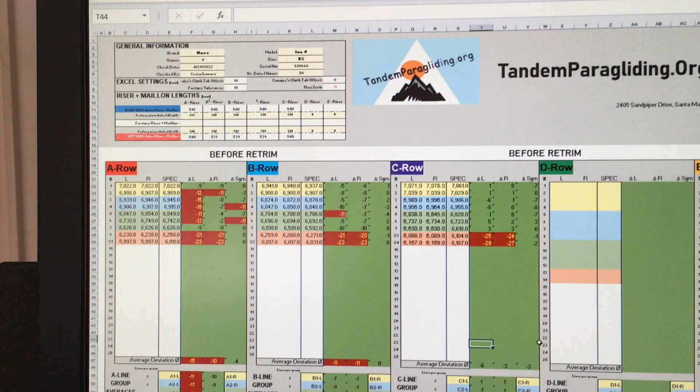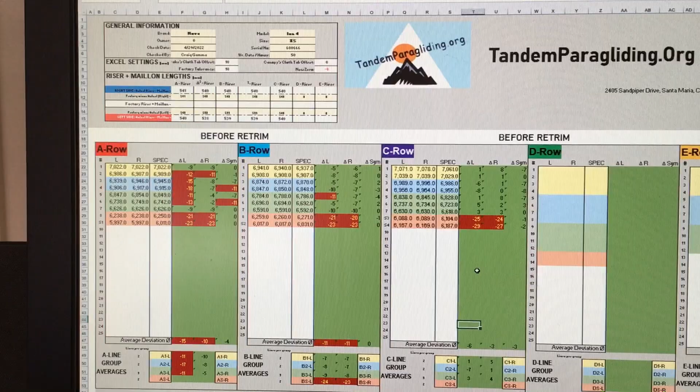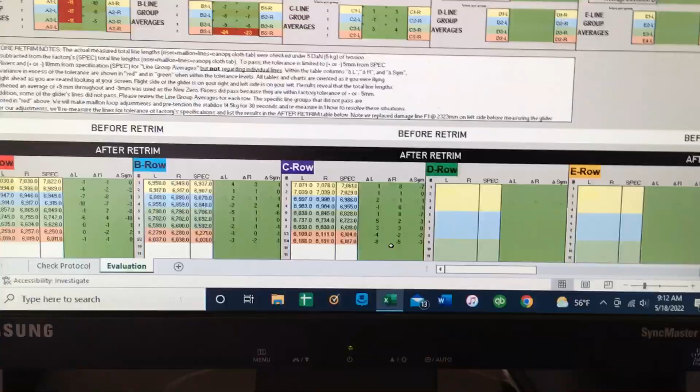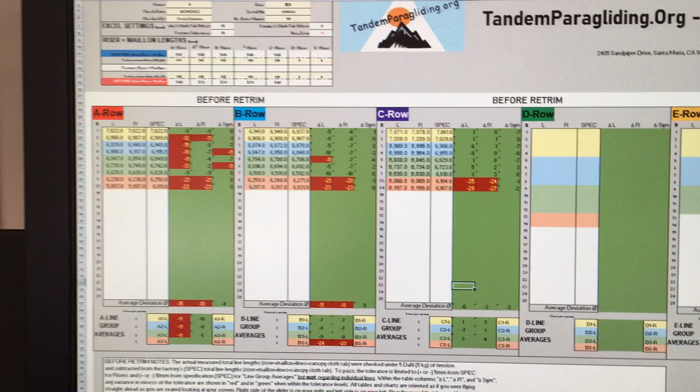This is our report, one view of it, and this is the before retrim table. If you scroll down, there's the after retrim table. If we look at the differences here, at a glance, what you see between after retrim and before retrim is the red. The red highlighted cells are the ones that are out of tolerance, that need to be adjusted so that everything looks like the after retrim report, where everything's green, meaning everything's within tolerance of factory spec, which is plus or minus 10 millimeters. So at a glance, that's all some pilots need to know: this is where we were before, and this is where we're at now.

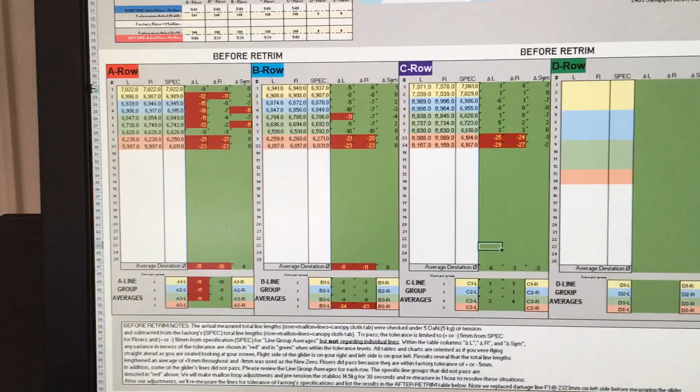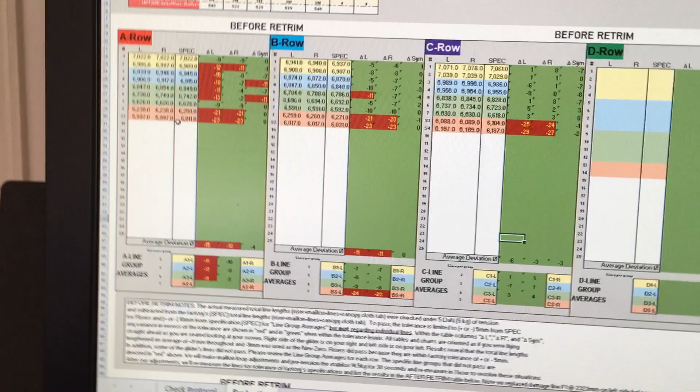But for those of you, like myself, who want to know all the little details, we can expand here further. If you look at the A row, as well as the B row and the C row, they're all broken down into colors. Lines 1 and 2 are yellow for all 3 rows, lines 3 and 4 are blue, lines 5, 6, and 7 are green, and the last couple lines are orange. That indicates the line groups for this specific glider. Every time we make a report, we change those colors and bring them to the different line groups that are specific to that one paraglider.

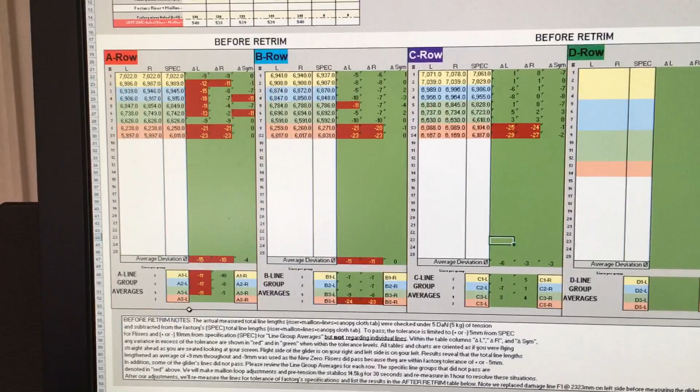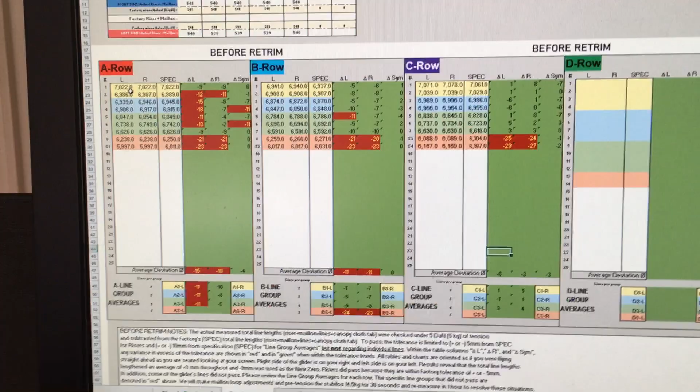And then we average the results down here. These are A line group averages, B line group averages, and C line group averages. This is where the adjustment comes into play. We don't look at all the individual lines here; we need to look at just their line groups, because all these lines go to one main line on the riser, and we adjust loops at the maillon on the riser. So the individual lines make no never mind, we have to look how they're grouped up. We look down here, see how they average up, and that gives us an indicator where we need to make the adjustments on the maillon.

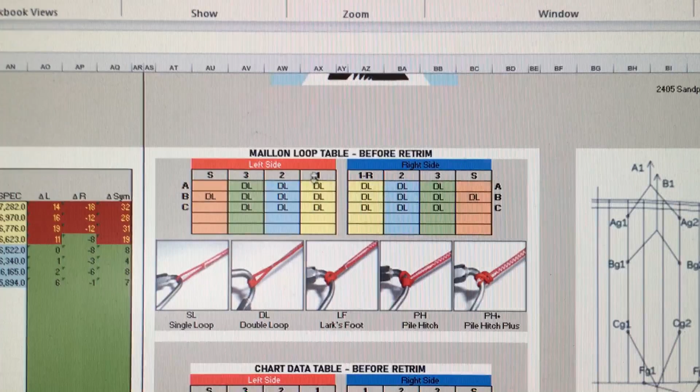So now if I scroll to the side here, I can see my before and after maillon loops. Let's go over to that and show you quick. This is the table that shows where the loops are on the maillons currently. This specific glider is a Nova Ion 4, and it has DL, which is double loops on all of their maillons.

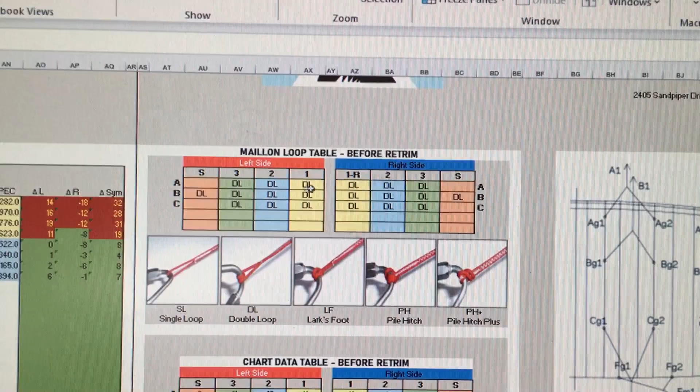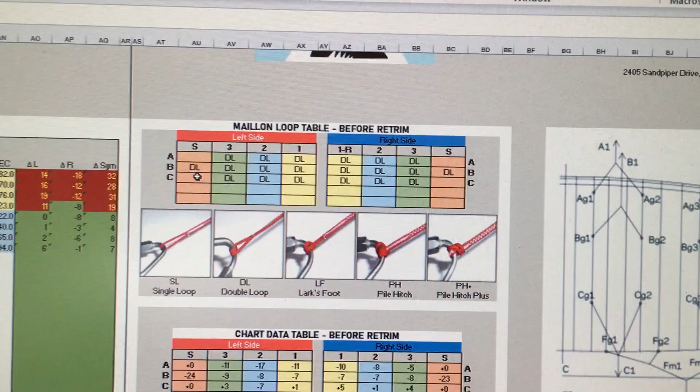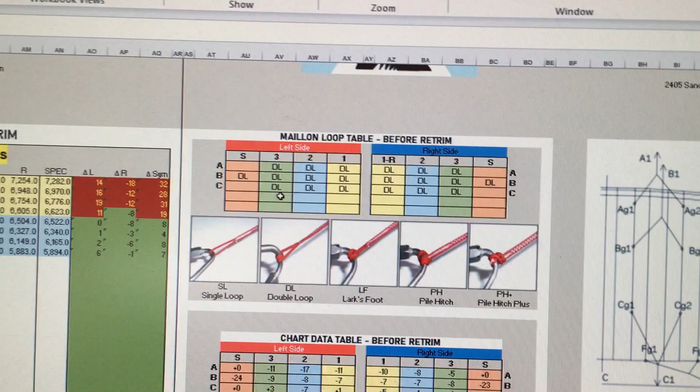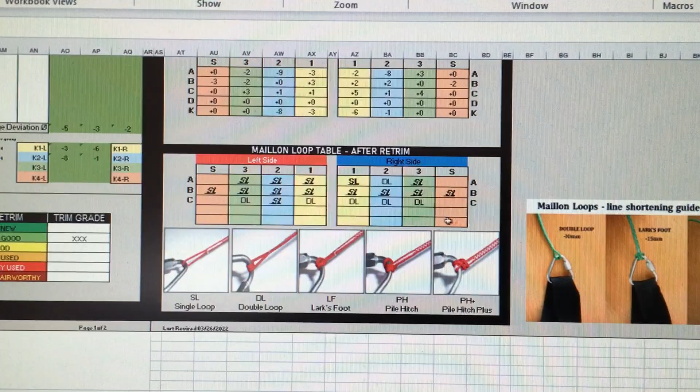But anyhow, after we make our adjustments, we'll scroll down, and you can see the table after retrim, and you can see our indicators show where the changes are. We went from double loops to single loops on all these different maillons for the different lines.

And so here's another blow up of how we make the different loops. There's a double loop, lark's foot, and so forth. But anyhow, that's not important for you all. Let me see what else I can show you that helps you understand.

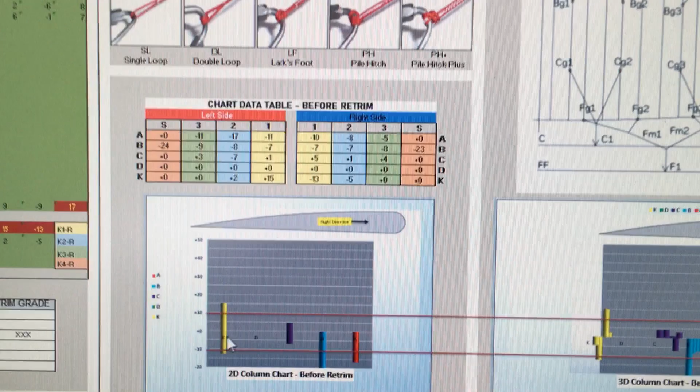So here's a graph showing before retrim. This is all of the A rows. The blue's the B's, the purple's the C, and the yellow is the brakes. You can see there's a red horizontal line at the top and one at the bottom, and that's plus or minus 10 millimeters. We have to be in between those two to be within factory tolerance of spec.

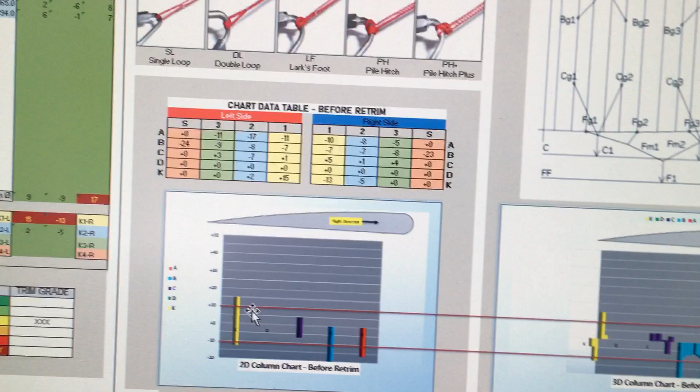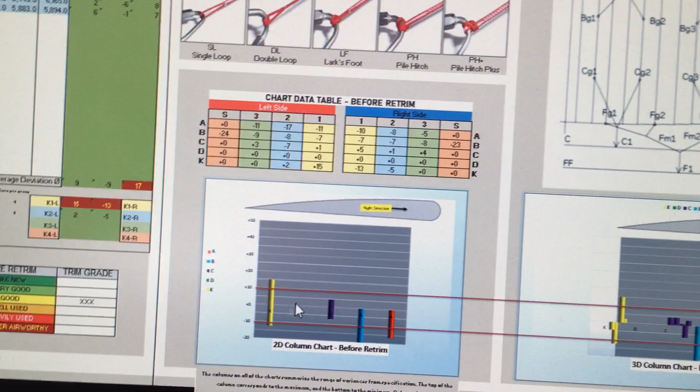We can see we break that red horizontal line on the A row and the B row, and on the brakes as well. Whereas after we retrimmed, we got it all in between. And if you look over here, this gives you more of a 3D aspect.

Excuse me while I try to scroll over. So here's before, and now we've got the different line groups revealed. Here for the A's are the red, the B's are the blue, C's purple, and yellow's brakes. Now the blue, you notice on the outside, the wingtips, those are the ones that breach the horizontal line, minus 10 millimeters, and those are your stabilos. That's very typical - those will shrink faster than the other lines because they're lightly loaded.

And see, we've got a problem here with one of the A line groups, but the other ones are borderline. But we want to make that all better, so after we trim tune it, this is what we have here. And that's what we need to do - have them all in between plus or minus 10 millimeters after our adjustments.

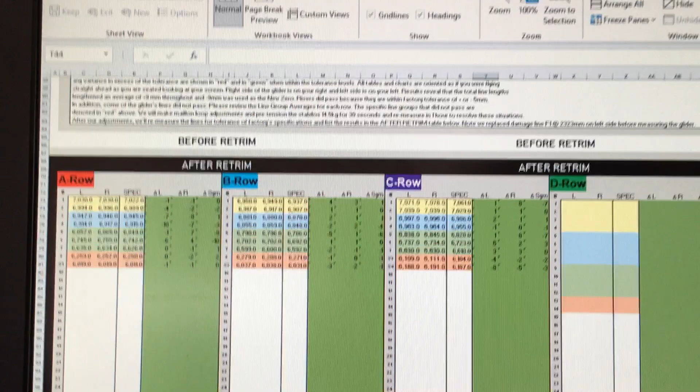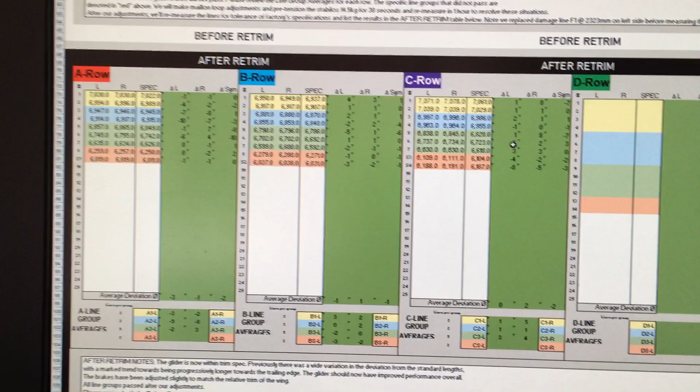And so that kind of gives you a gist of our report and how to read it. We want all green, and that's the end result. For now, you may have individual red spots, individual lines up here in areas where we're not averaging the groups, and that's not as important as we want all the red gone in the line groups down here.

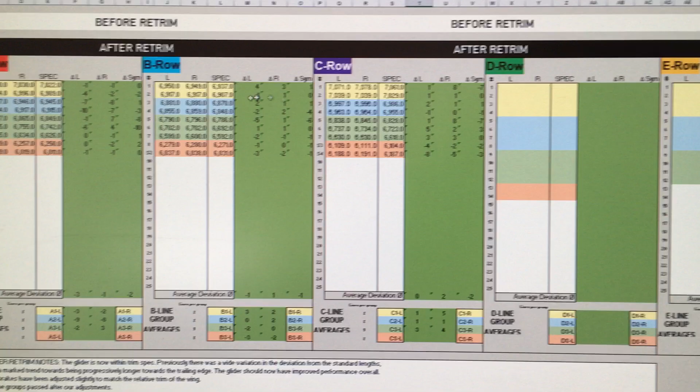When we average these lines, that'll come to the mean. So occasionally people have isolated red ones that aren't to be concerned with. It's all down here - A group, B group, C group, all the line groups. This is where the red's important.

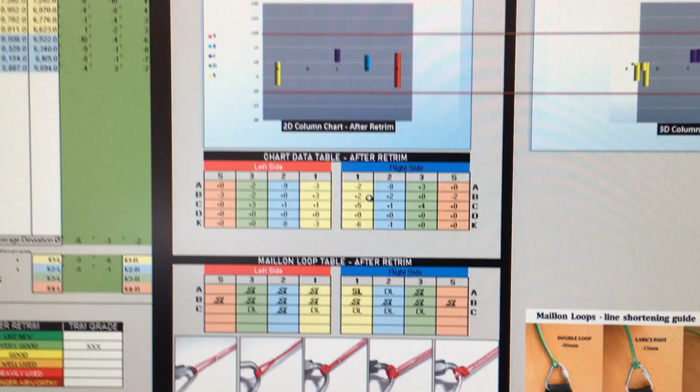There's another thing we look at that's a little more technical that you probably don't really need to understand, other than what I've already mentioned, and that's pitch. We want to make sure that the pitch between A, B, and C row vertically - so like A1, B1, you can see my cursor here, A1, B1, and C1 - can't have more than 4 millimeters difference between the B row.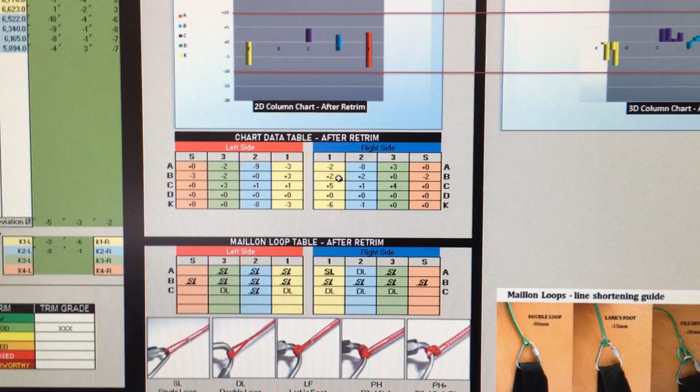So between the B row here, we got +2, and the A row is -2. Well, we don't have more than 4 difference. And then here between the +2 and the +5, there's only 3 difference. So here we're right at 4. And so those are the things that we look to do - we want to keep the pitch right so that it's in balance with the B row.

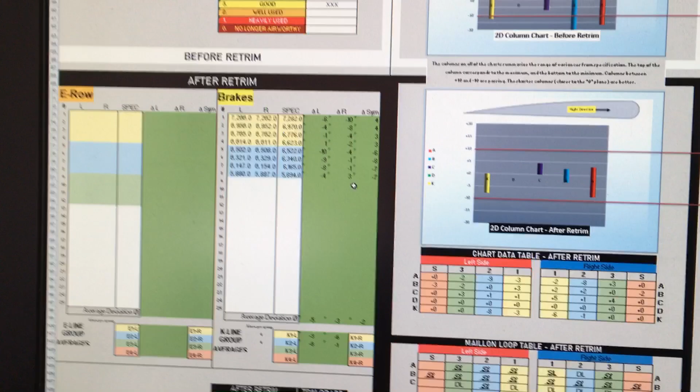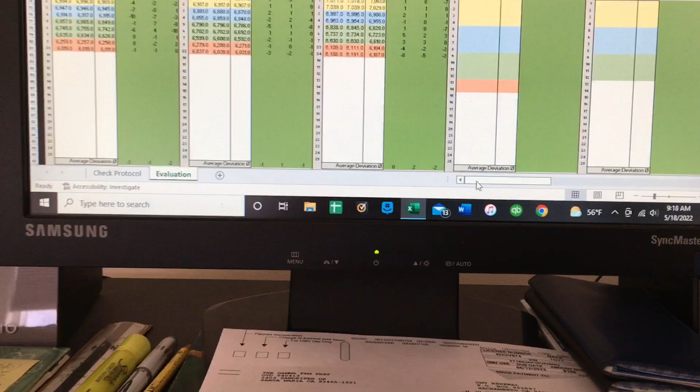So our angle of attack is maintained. It's not either pitch speed, meaning trim fast, or pitch break, where it's trim too slow. And so those are technical things that we look at in order to evaluate. Not just eliminating the red, but we want to make sure that even if we got all green, like the table shows here, that our pitch between our A, B, and C rows is proper.

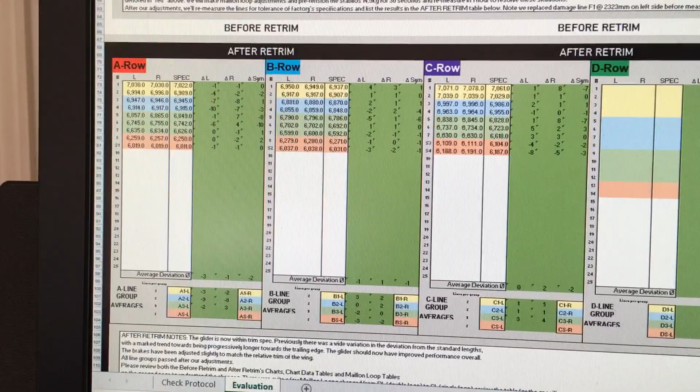And so that kind of gives you a good idea of how our forms are to be read, so that you can understand the results better.